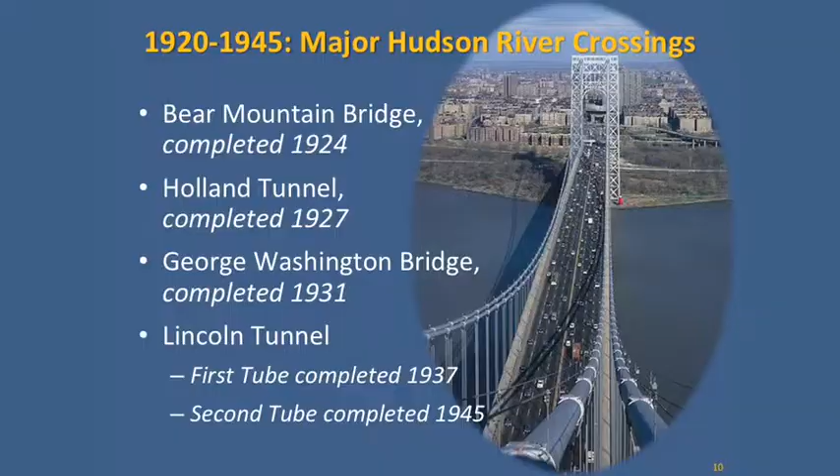Now, a southern Westchester crossing was also discussed at that time. There was thought of a bridge linking the village of Hastings.

They were thinking about Hastings. They were thinking about Dobbs Ferry. There was also talk about Irvington as the eastern landfall for a Hudson crossing from Westchester to either Rockland or the northern tip of New Jersey just south of it. But instead, the location for the bridge became the Tappan Zee. It was a challenging spot because the Hudson is almost 3 miles wide there. It's the second widest point along the entire river, much wider than the length of most bridges. That length presents engineering challenges, not to mention financial challenges, because the longer the bridge, the more materials you need and the more money you have to spend.

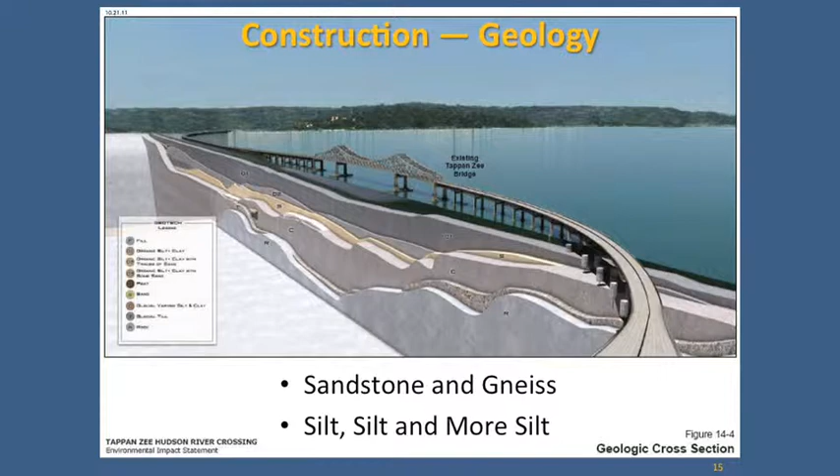Now, although it made sense from a legal perspective, the location presented engineering challenges even beyond the sheer length of the expanse to be crossed. The Tappan Zee's geology presented serious construction issues. The main river channels in the center of the riverbed were cut very deep from hundreds of millions of years of erosion and glaciers. That big chasm was then filled with silt, of different texture and made of different rock depending on where in the channel you were and how far down into the riverbed you went. This silt in some places was hundreds of feet deep. Now, how to keep the center of that bridge stable when bedrock is so far below the surface was a real challenge.

The solution is something called the floating caisson. There were 8 floating caissons anchored by pilings which bridged the deepest part of the channel crossing. The word caisson is a fancy name for a big box. Floating caissons, gigantic hollow concrete boxes, were used to build temporary bridges in World War II.

In fact, I have to tell you a little story. Generally, when I write presentations or speeches or articles at night, I keep the TV on in the background for noise. I had it on while typing up this presentation, and at one point I looked up and said, 'That's a floating caisson on my TV screen.' Turned out I had the History Channel on, and there was a show about the Allied landings in Northern Europe. Floating caissons were used to build temporary bridges to bring vehicles and troops from harbors onto dry land, and part of how they built those temporary bridges at the strength they needed, but quickly and cheaply, was the floating caisson.

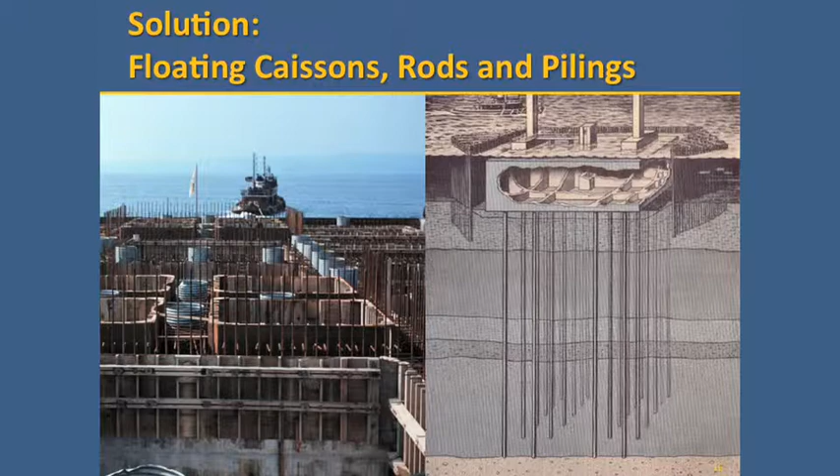So the way they did that was they sunk rods through the bottom of the caissons. Some of these rods are 295 feet long. They're sealed with a special - I hesitate to use the word caulk because it's not the stuff you put in your bathroom, but there is a form of special cement designed by the engineers which serves as caulking around these rods. These rods would give the caissons support all the way down through the silt to a more gravelly bed, which provided more security for the structure.

Given the length of the bridge and the differing composition of the riverbed, and the difference in geology between the east and west landfall, you had bedrock on the west side, which was sedimentary rock, and you had a harder metamorphic rock on the east side. The bridge is a composite of different bridge types.

Originally, the plan was for a tied arch bridge in the middle. That project was actually put out to bid, but there were no bids from the steel erecting and fabricating companies, because no one was able to build that type of bridge within the budget presented by the Thruway Authority.

So instead, the center of the bridge, the main span, is comprised of 2 cantilevered sections. For those who don't know, a cantilevered bridge is supported with sections that jut out from a stable support. So they're not supported underneath, but the load gets sent to the side into supports. The cantilevers are joined in the middle by a suspended section that's like the last piece in the puzzle. There are actually pictures of it being dropped in the center.

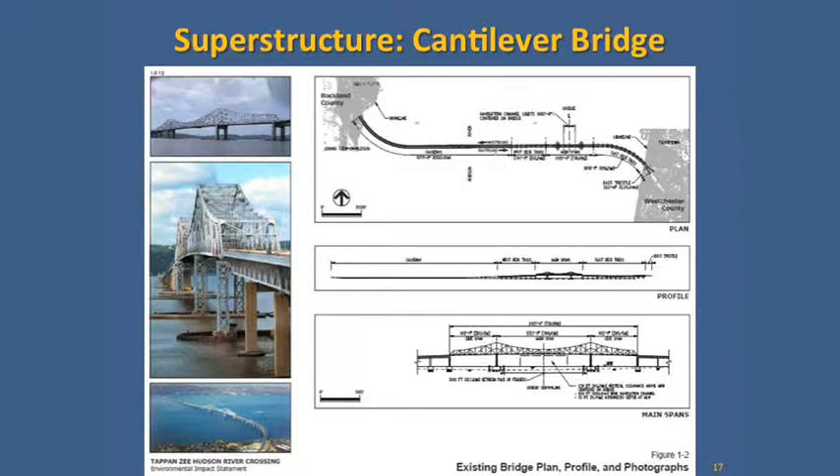Now these sections, your center trusses, your cantilevers, and your center section, are known as the main span. They're higher than the rest of the bridge, 138 feet off the water, so that big ships coming up the Hudson can fit underneath. In between the main span and the river banks are east and west deck trusses, an east trestle by the tolls, and an approximately 8,000-foot-long causeway that leads from the main part of the bridge down into Rockland County.

Now, here's some math for those interested. The bridge total length is 16,013 feet, a little less than 3¼ miles. The main span, all 5 pieces I told you about, is 1,212 feet. The center span is 531. Each cantilever is 340. Then you have each 602-foot span on either side. The 2 deck trusses together, east and west, total about 4,800 feet, almost a mile. The east trestle leading into the tolls is only about 300 feet, and the west causeway is 8,000 feet.

Now, thanks to Andrew O'Rourke Jr., the Public Information Officer for the Thruway Authority, I have some great archival photos of the actual construction of the bridge, which began on March 16, 1952.

This is just a little taste. There are books, websites, and other sources where you could see more of this, but here we go.

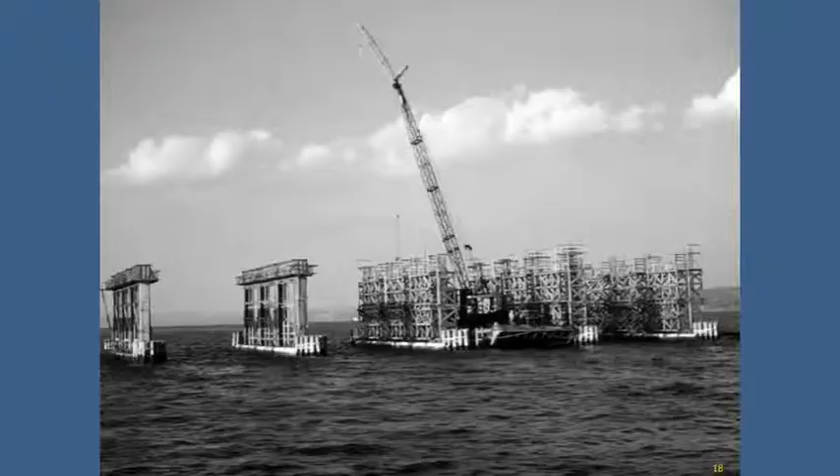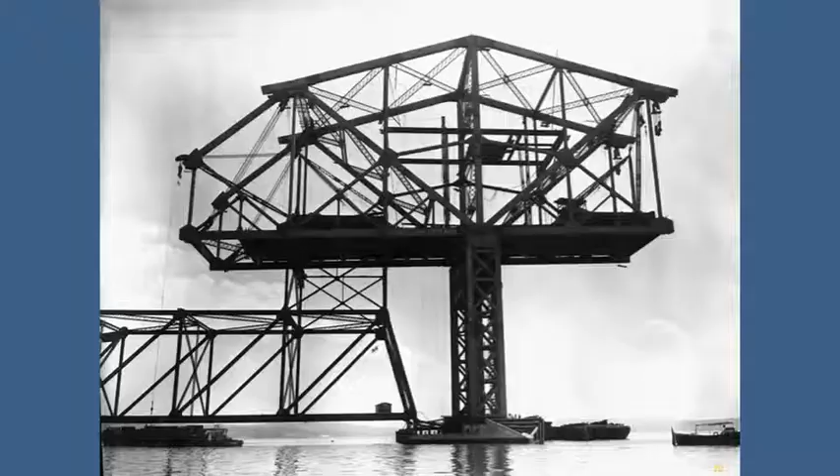We're getting what are called bents, which are the supports under the causeway and the deck trusses into the river. There we have one of our cantilevered sections, being lifted up onto the center piers. That's what the two cantilevers look like. See how they jut out from their support?

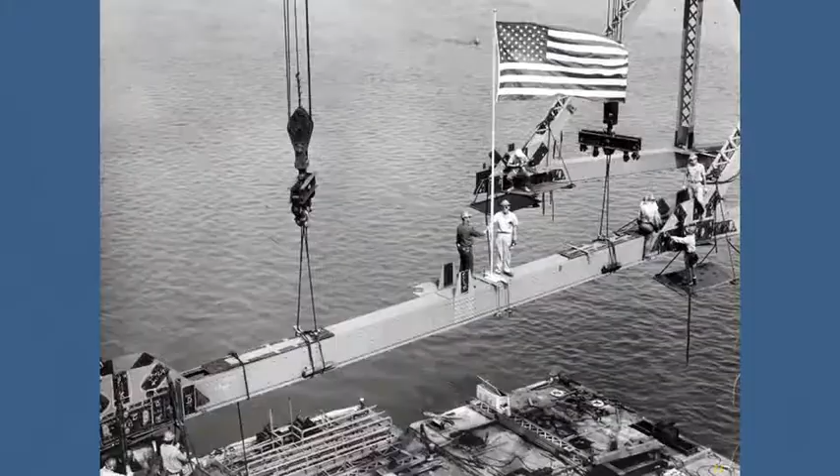And now we're just waiting to drop in the center span to tie it all together. There's the first beam put across, joining the whole bridge. You know what this reminded me of? Remember the Golden Spike when we were in school, the Transcontinental Railroad? The two railroads united, and you had people shaking hands in a nice ceremony. Well, that's what we had here. And then that's what the bridge looked like at the end of the day, the completed structure.

The Thruway, of which this Tappan Zee was a critical link, has had a big impact on everyone. It changed the way most of our freight is moved. It's increased our mobility and given us more options in planning or not planning our trips. We can hop in our car whenever we want. It certainly reinforced the auto-dominated nature of the suburbs.

By providing an easy link to the New York City side of the Hudson, the Tappan Zee Bridge had a huge impact on Rockland County, much like the impact the railroads had on Westchester a century earlier.

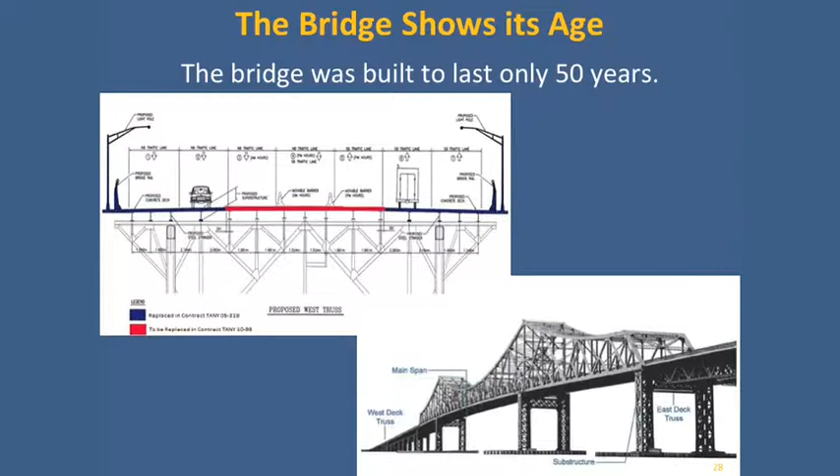So those metal sections are going to start rotting out sooner rather than later. The West Causeway leading to Rockland County was not set on steel piles or floating caissons like the rest of the bridge. They were set on untreated timber piles. That's become a real problem today because when this bridge was built, there was a lot of industrial pollution in the river, and a lot of native species had died back or died out entirely.

Now that we have a cleaner Hudson River, the shipworm has come back. The shipworm is actually not a worm, it's a kind of clam. It bores into submerged wood. So there are concerns about the long-term health of the causeway, because with the return of the shipworm, they may start eating the timber pilings underneath it.

Now you also have other problems you may not know about. There's really no good way to access the rods supporting the caissons. You have 200 deck joints as well, which you can see. Sorry about that, I knew I was going to have trouble with the technology sooner or later.

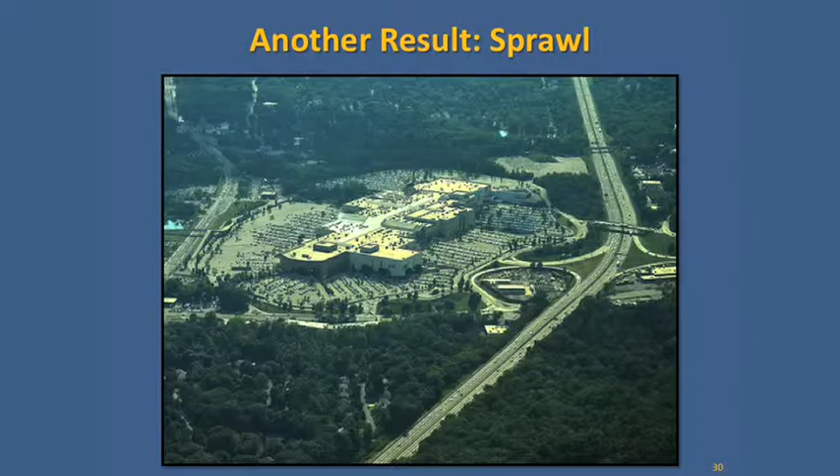But when you drive along the Thruway behind copses of trees, you see all kinds of corporate headquarters and shopping centers. There are many more malls along this stretch of road as well. What that does is compound people's dependence on cars, because you can't walk to this. And when you let your mass transit systems atrophy, when you let the system of railroads that existed on the Rockland County side of the river atrophy, everybody is tied to their cars.

If you're operating over capacity, whether you're a bridge or a person, it's not good for you. It's not good for the bridge, and we've seen that bridge was already designed to cause trouble. This is obviously going to cause it even more trouble. But this is hard on people too.

When you're stuck in congested traffic, you lose time, you get stressed out. You're not exercising, so your cardiovascular system goes. There's more and more pollution you're breathing in, which isn't good for your lungs.

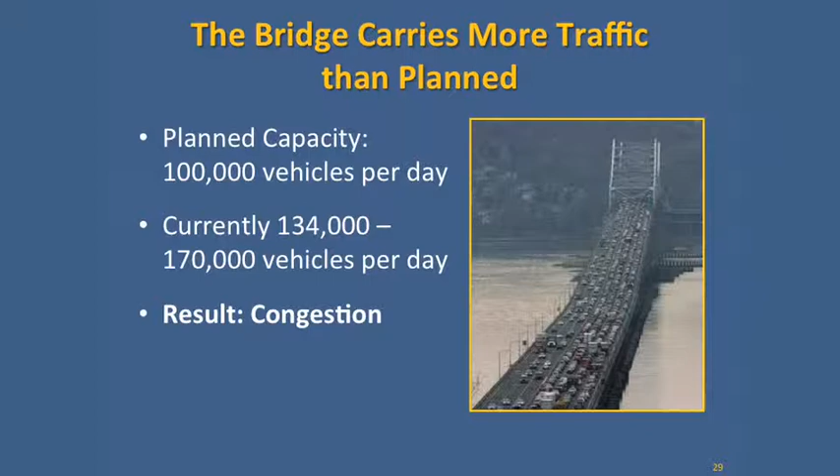It adds more stress in that your form of transportation becomes less and less reliable. If you're sitting in traffic, it's hard to predict. When you take a train out of Grand Central, you're pretty sure when you take the 11:20, you're going to make it to Hastings at 11:57, and Dobbs Ferry at noon, unless something extraordinary happens. When you get in your car, coming back from a holiday weekend, or leaving for one on a Friday afternoon in summer, you don't know how long it's going to take you to get to the Catskills or back. It depends on how bad the traffic is. This makes it hard for people to plan their lives, and there are also physical and psychological consequences to that.

Now, with all of the stress on the bridge as well as on us, structural problems begin to mount. The one big problem that everybody was able to see in the last decade was the punch-through.

Punch-throughs are holes through the deck of a bridge, showing the land or water below. The Tappan Zee Bridge has experienced more punch-throughs than you'd want to think about. In 2000, 2003, and 2004 — I won't tell you why we don't have figures for 2001 and 2002 — for those three years, we had an average of 56 punch-throughs on that bridge.

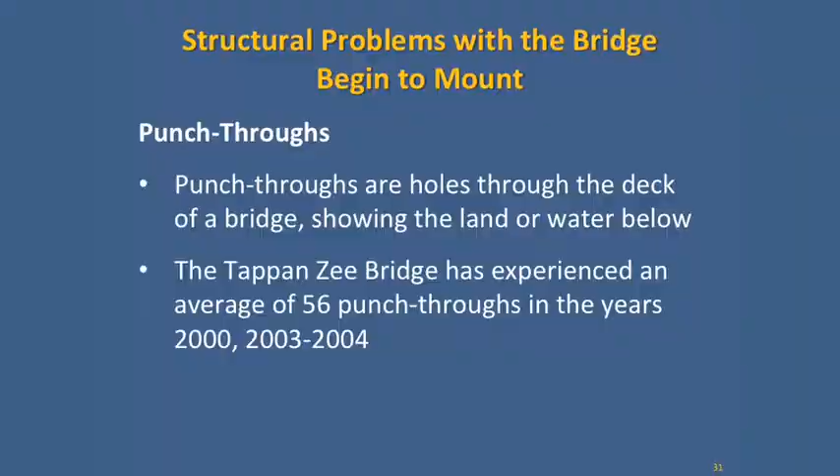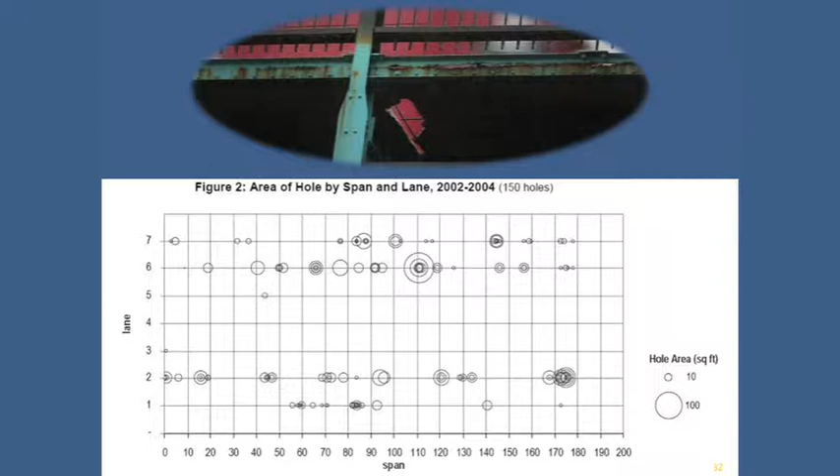Now underneath, this is even scarier, folks. This is a graph from a revised draft of an engineering report done by a private firm for the Thruway Authority. It plots out, lane by lane — the Tappan Zee has 7 lanes — and span by span across 200 spans, where the punch-throughs occurred in the years 2002 through 2004. Each circle represents a single punch-through. Remember, these are holes — you've got the deck you're standing on, then the river below. The circles are different sizes, each size representing a different size punch-through.

The ones that really give me the willies are like this one — over a punch-through over 100 square feet. If you think about the length and width of a car, that's a very scary punch-through.

In the 18 months before another 2009 engineering assessment, there were 45 punch-throughs. So I guess you could say they leveled off, but 45 punch-throughs in 18 months, on a bridge as important as the Tappan Zee, and one that carries you, is a real problem.

For obvious reasons, the bridge needed major rehab work. In the last 6 years, we have spent close to $280 million just to replace the worst parts of the deck of the bridge to prevent more punch-throughs. From 1970 to 2010, we've spent over $1.1 billion on fixing the current bridge, and it's not getting that much better.

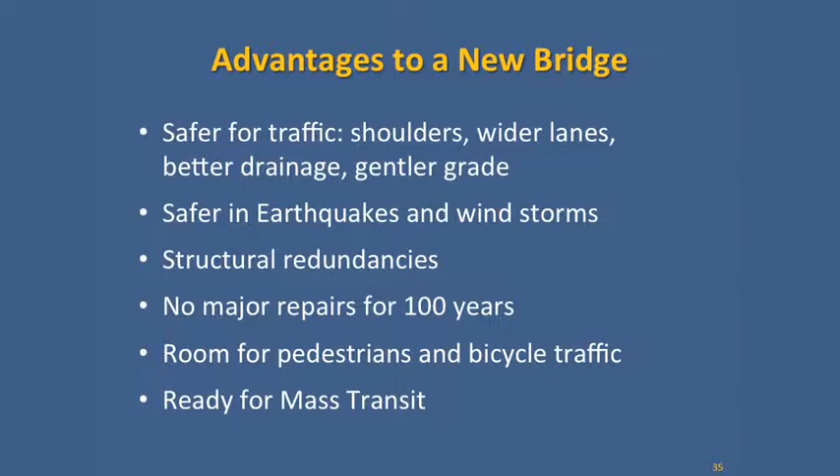There are viewing platforms. One thing we are going to have that we don't have on the old bridge is what are called suicide screens. I don't remember the bookend years, but there is a 10-year period in the last 20 when there were more than 25 suicides off the Tappan Zee Bridge. This kind of thing will help prevent the kind of impulse attempts on people's lives that are the kinds of suicides where people throw themselves off bridges.

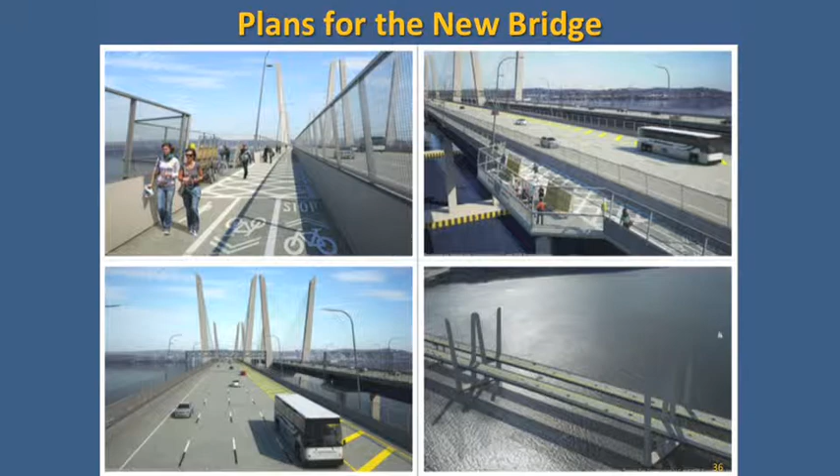As you can see, there's been a little bit of controversy on my staff about this, but the old bridge looked very industrial, very industrial revolution, very 1800s, early 1900s. This is a postmodern bridge, a more graceful looking bridge. And with the light colors, you can see it doesn't quite blend into the atmosphere, but it lives a little bit more harmoniously with it.

Now, we can keep building bridges, but beyond a certain point, we've got to talk about how we've structured our civilization at this point. With everything centered on cars, you end up with a lot of traffic, and you end up with the problems that traffic causes.

Since the year 2000, when the discussion about what to do about the crumbling Tappan Zee Bridge began, people have taken the tack that we need to talk about how to turn this into a better future for the region, and that future should include more mass transit.

Now, these are the arguments in favor of mass transit. Call it demography is destiny. On either side of those of us who are middle-aged, there is increased demand for mass transit. Young adults don't like driving as much as we all used to. They don't rush out as fast to get their driver's licenses. They delay the purchase of their first cars. They like mass transit, they believe in mass transit, and they want more of it.

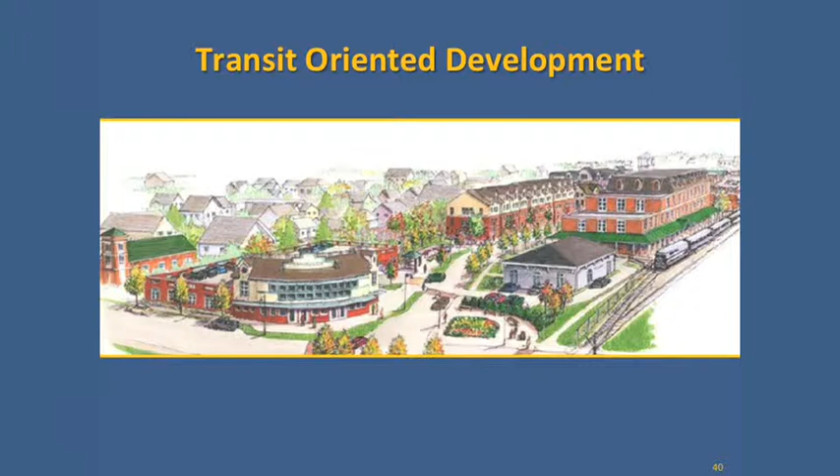As I said, there is a growing demand for mass transit as well. So if we can concentrate this kind of development in mass transit corridors, we can develop thriving mass transit systems along with thriving diverse communities. And if we center all of the concentrated development near the mass transit, which is generally in well-trafficked areas now, we can save our open spaces. It'll be easier for us to save our open spaces as well. So there's really potential in this kind of concept.

So the Tappan Zee Bridge was built, the original bridge, was built to serve the kind of communities our region had been building for well over a century, the suburb. And its existence created even more suburbs. Because it was built on the cheap, we need to replace it. And since we need to confront the disadvantages associated with automobile-centric suburbs at the same time, a mass transit system centered on the bridge, doing both at the same time, will generate the mix of options that our people need, and that will help preserve our environment in the long run.